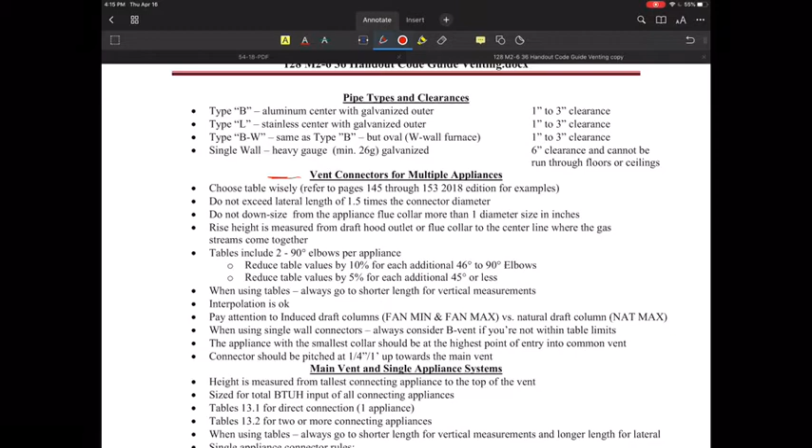So the other area to pay attention to is obviously whether you're dealing with fan minimum and fan maximum. So is it a fan assisted appliance or not, or is it natural draft. So you just have to understand those things. If you're using a single wall connector, be very careful. You may have to consider a B vent if you're not going to be within those limit values.

Most of the time the heat loss is so excessive in a single wall vent connector that it just doesn't allow you to do that. So you may have to say, all right, I want to do a single wall, but I can't, I'm going to have to use a B vent. So most of the time what people do is they'll run a B vent as far as they can go and then maybe have a little tiny short piece of the single wall to just get them connected. And you can still use the single wall as long as you keep it to a very minimal amount.

So as with all of them, make absolutely certain that the smaller appliance is the higher one, the point of entry in the common vent, and make sure you keep your pitching upward. The more the merrier on pitching upward. You want to make sure that you're not fighting against the buoyancy of those gases.

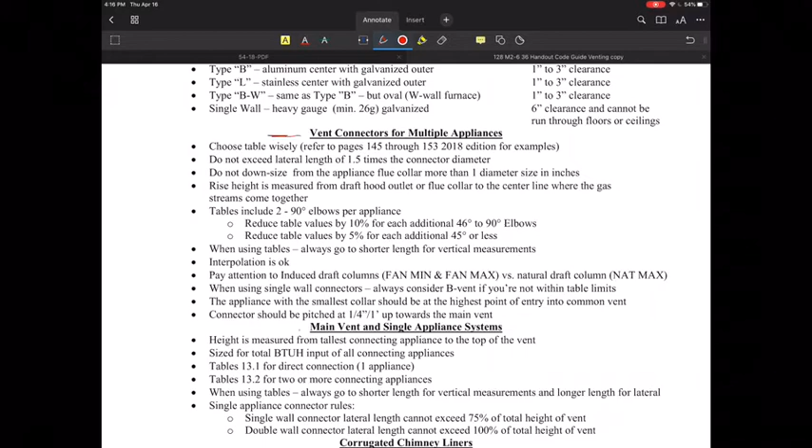So the main vent, moving on to the next one here. So the main vent in a single appliance system. The height would always be measured from the connecting appliance to the top of the vent system where it exits the vent cap. So size it based on the total BTU input of those appliances. And then you can look at table 13.1 for the direct connect. That would be basically a B vent going directly to the appliance, the easiest way to do it, or direct connection would be one appliance.

So identify whether you have single or double wall connectors. Good rules of thumb when you're going to use the tables: always go to the shorter length for vertical measurements if you're trying to figure out whether you need to interpolate or not. And of course the longer length for the lateral would also function as well. So that would be a good way to look at this.

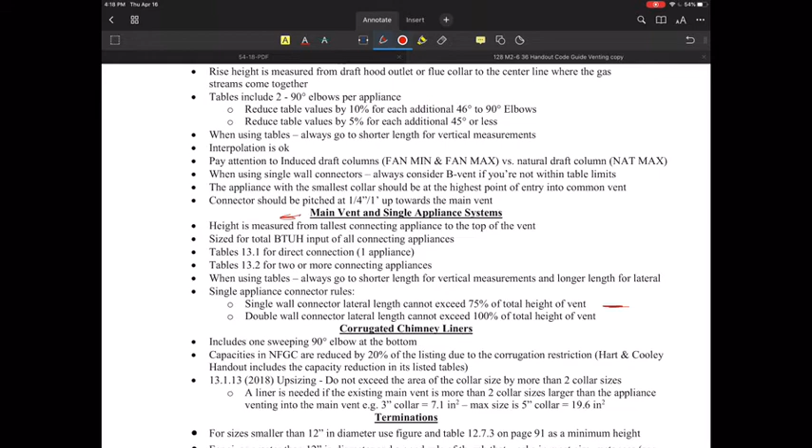Single appliance connector rules. For a single wall connector, the lateral length cannot exceed 75% of the total height of the vent system as a general rule. And with a double wall, you can go 1-to-1, so that's 100% for a double wall connector. Again, be very careful using single wall vent connectors with long laterals. You're really going to run into problems where those appliances potentially will not vent correctly. So be very careful with that.

Corrugated chimney liner. One other handout I had was a chimney liner handout, and that was handout 32. This is just kind of a ballpark corrugated ruling based on the code book. You take the values for a non-corrugated liner and reduce those values by 20% of the listing for those restrictions. So you could essentially take the value for maybe a B vent and then reduce it by 20% if that were the liner you were putting in, or it could even be a chimney in that case.

So just be careful with that. But that's probably the easy way to do it. Just deduct it by 20%. It includes one sweeping 90 elbow at the very bottom. It doesn't include the other one. So you still have a little bit more that you have to reduce.

In 13.1.13 of the 2018 code, they talk about upsizing. Do not exceed the area of the collar size by more than 2 collar sizes. And a liner is needed in the existing main vent if you have two collar sizes larger than the appliance that you're venting into the main vent.

Where you really have to concern yourself is when you're dealing with smaller or larger appliances that you're ripping out that were common vented, and now you're left with a single appliance. You can oftentimes run into a problem where that vent size is so big now that it really will not vent correctly. So you have to really be careful with that.

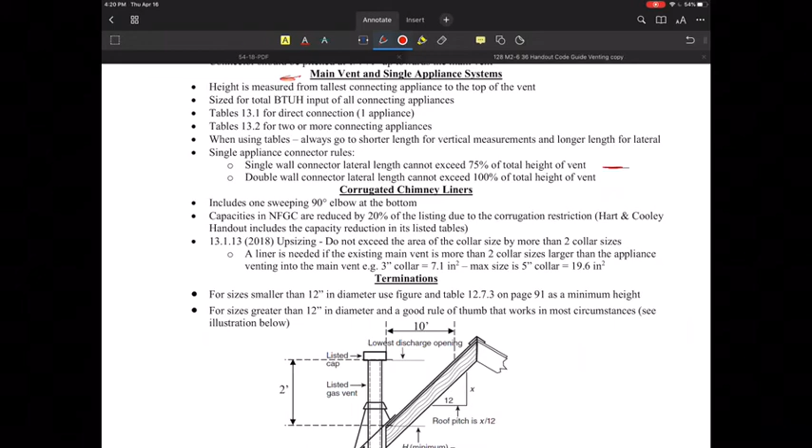And then the last part of the handout describes terminations, dealing with the height as it exits and how close you have to be. So for your small systems, 12 inches in diameter or smaller, which is the majority of our systems, you can use table 12.7.3 on page 91 to determine your minimum height exiting. And that's based on the pitch of that application.

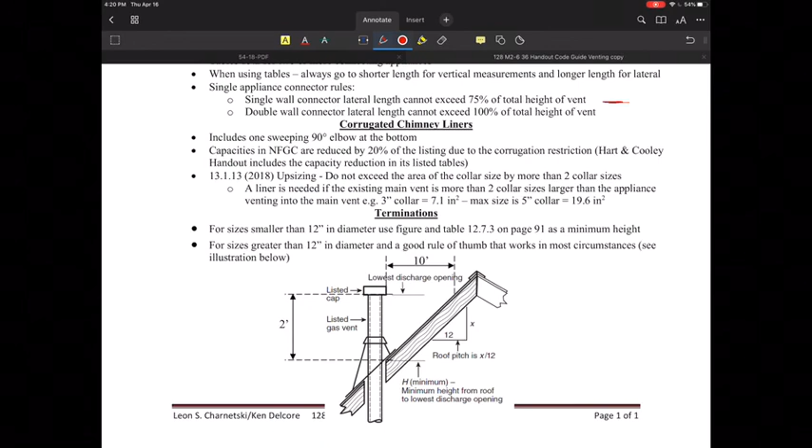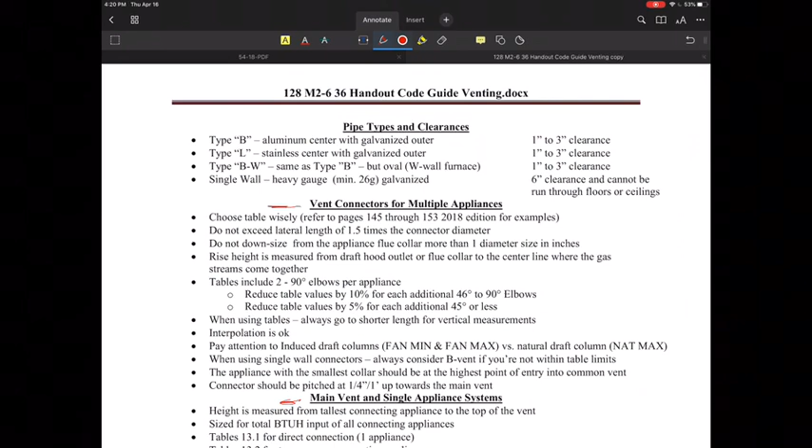The more vertical height you have, as a general rule, usually you benefit, since height and heat are the two most significant factors in the success of any type of vent system. So hopefully that's a helpful guide on using the code book and understanding the vent tables.